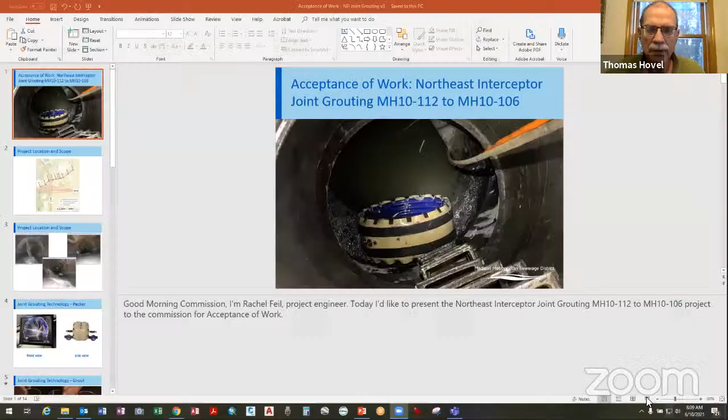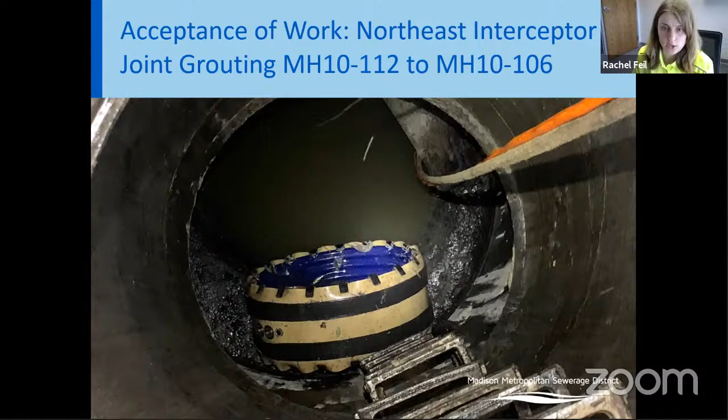Okay, are you able to see my screen in presentation mode? Yes. Okay, thank you. Good morning, Commission. I'm Rachel Feil, project engineer, and today I'd like to present the Northeast Interceptor Joint Grouting Manhole 10-112 to Manhole 10-106 project to the Commission for acceptance of work.

The project location is shown here in red. The project is near the intersection of Highway 30 and Highway 51 on the east side of Madison. North of that intersection, the Northeast Interceptor runs on the north side and then continues on the west side of that intersection before reaching Pump Station 10.

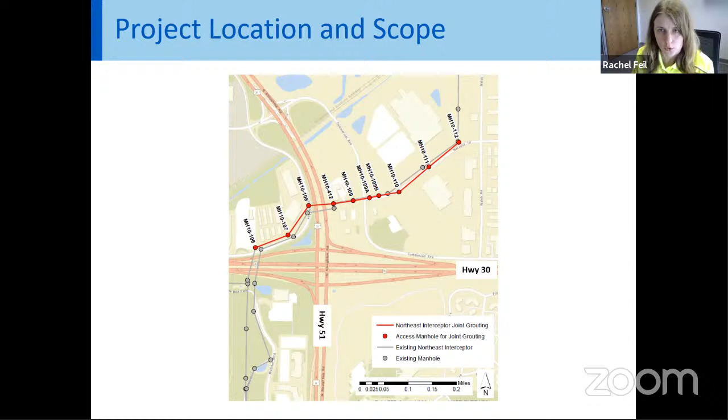There are two parallel lines that make up this Northeast Interceptor. One was constructed in 1964 and is 48-inch diameter reinforced concrete pipe. Routine district inspection recently of this 1964 sewer revealed that the pipe was in good structural condition, but numerous joints were suffering from inflow and infiltration, known as I&I. Here are some photos of the district's inspection of the interceptor.

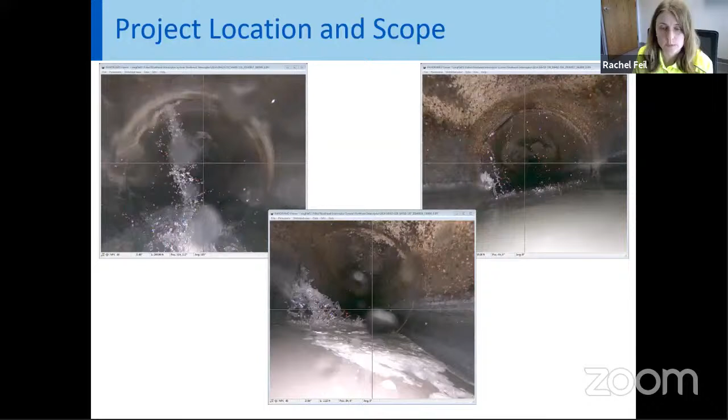As you can see in these photos, there are leaks of I&I located at the pipe joint itself where water is coming in. I&I is an issue for two reasons: one, it takes away capacity from our interceptor, and two, it represents water that is being unnecessarily pumped and treated.

Leaks such as these can be addressed by joint grouting. Joint grouting is a technology that uses a donut-shaped piece of equipment known as a packer. This packer is placed inside the existing pipe at the leaky joint and pumps out grout to seal the leak.

I wanted to share two photos, two different views of the packer. First, the front view of the packer when it's inside the pipe. You can see the rigid blue skeleton or frame of the packer, which supports on the outside a tan soft skin that seals against the pipe on both sides of the joint to create a seal.

Now, on the side view of the packer, you can get a better view of what that skin looks like that seals up against the pipe. You'll notice there are two ridges, which essentially straddle the joint in the middle. When inflated, these ridges create that seal, front and back, with the joint in the middle. This is where the grout comes out, pushed right into the leak itself to seal it up.

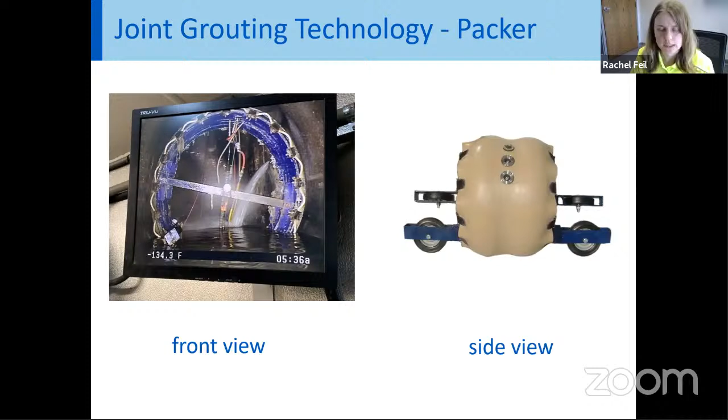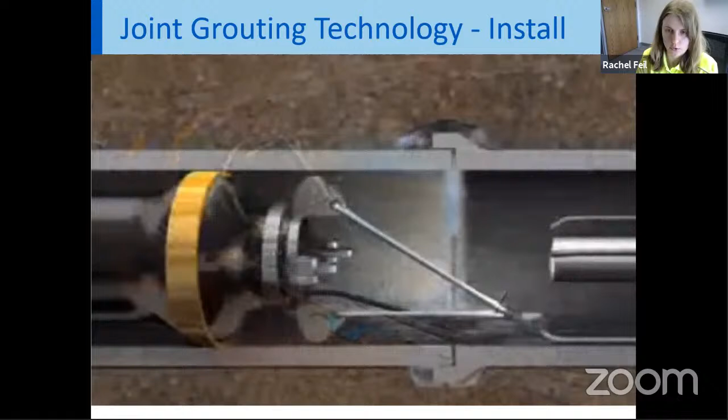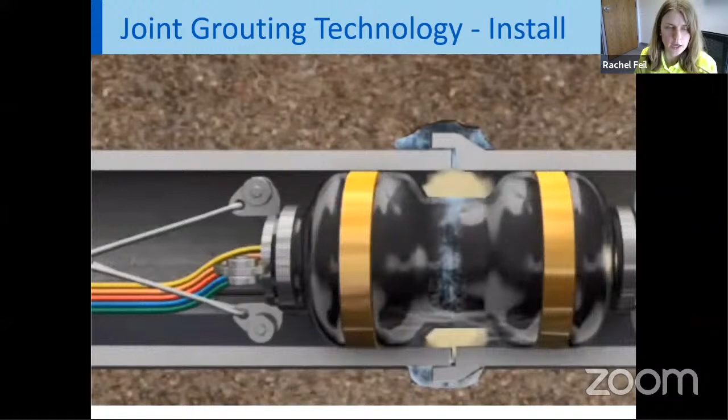So now putting this together, this packer technology and the grout, I want to share another video. Here's the leak at the joint, and the packer for this video is shown in black. We'll see the packer moving into position, inflating itself to create that seal, and now grouting, sending grout out to seal that up.

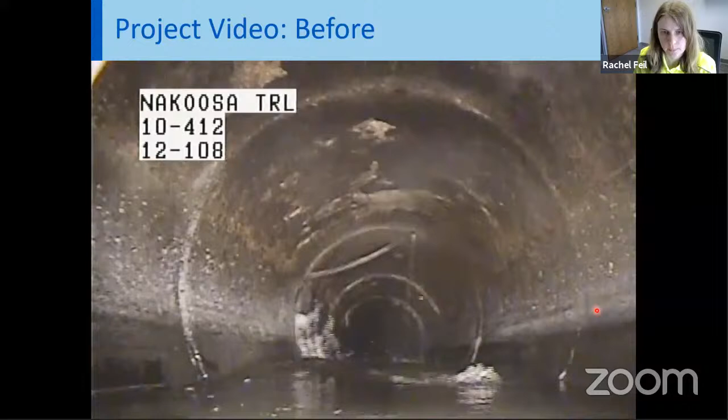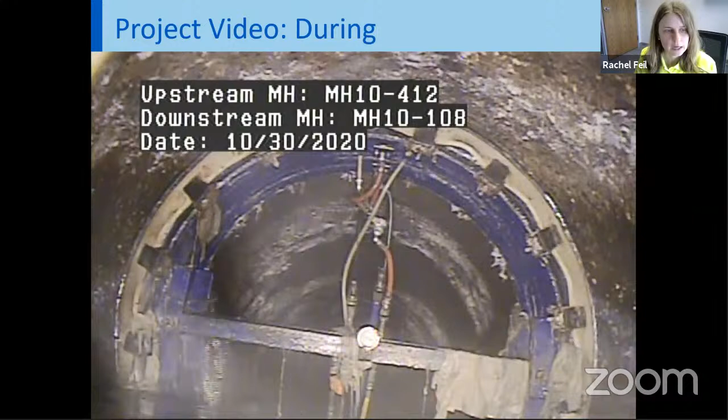This here is the during video. The packer is in the pipe here, moving in on this joint. In the video, you'll see this is that joint. You'll see a little bit of water coming out the backside. It's right about to inflate, right before it gets that seal. Just to show you, it's in the pipe and about to seal itself.

Now, this is the after video, after the packer has pressed up against the wall of the pipe, sealed, and pumped grout. In this video, the packer is currently sitting on that leaky joint. When it moves, we should be able to see if the leaks were fixed. Here it's pulling away from the joint, and here in white, that is the grout ring. No more leaks are present at this joint, so we have successfully sealed this joint.

This joint is just one of the 280 joints that were grouted from this project. Overall, this project eliminated approximately over 28,000 gallons per day of I&I, which translates into increased capacity, energy, and cost savings. I also want to mention that this project was the first time we at the district have grouted large 48-inch diameter pipe of this size. This project is also the first of 2 projects to continue to address leaks in the Northeast Interceptor. There will be a second forthcoming project that will continue down the line addressing leaks to Pump Station 10.

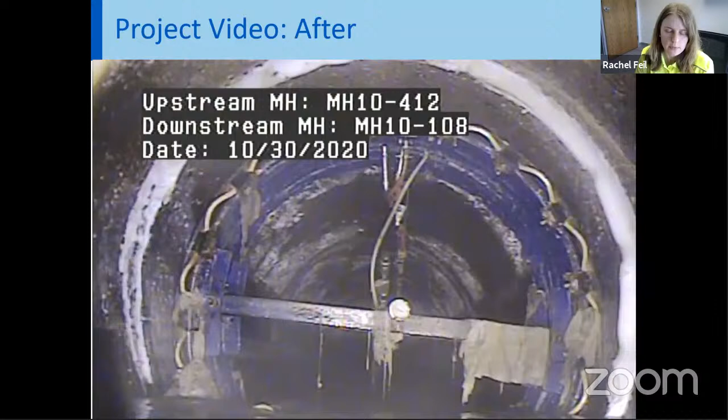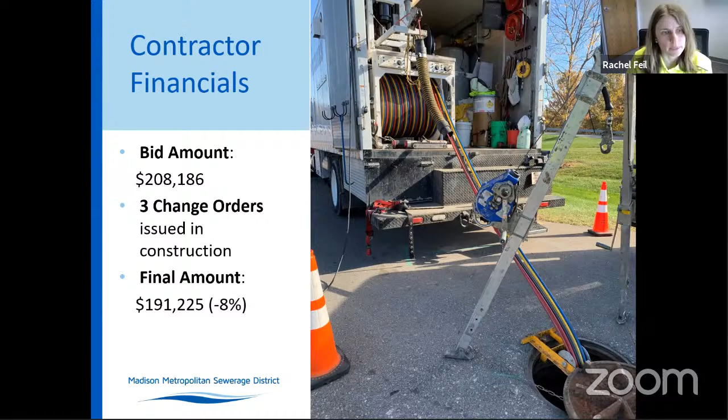Moving on now to project financials. From a contractor perspective, Michels Corporation was awarded the project. Their bid amount was approximately $208,000. During the course of construction, there were 3 change orders, and at the end, the total amount was less than the bid amount, approximately 8% below, or about $191,000.

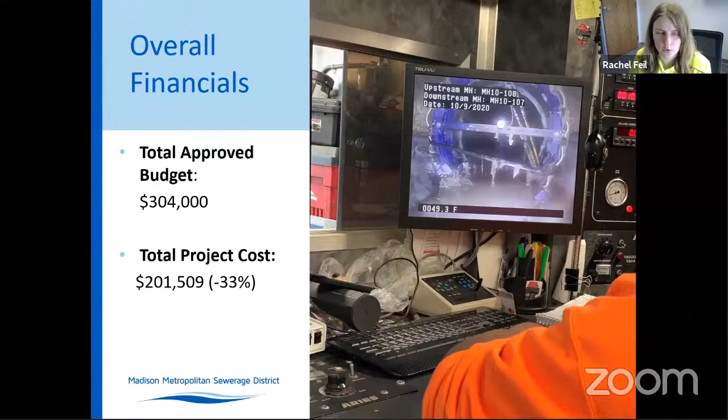From an overall project standpoint, including costs such as district labor with the contractor's construction cost, the total approved budget for this project was $304,000. At the end of the project, with all costs included, we are significantly below that, at approximately $201,000.

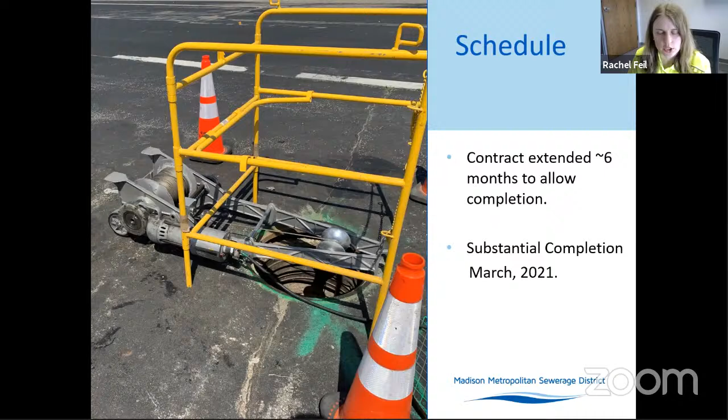To speak to the project schedule, the work started in 2020 and the project schedule was extended by 6 months. This did not pose any problems to the district, and the project was substantially complete in March of this year.

In conclusion, this Northeast Interceptor joint grouting project has been completed and has reduced I&I. A resolution has been drafted to accept the work. The district will hold a $10,000 maintenance retainer. $5,000 of that will be held as a retainer for the 11-month post-grouting televising and will be released thereafter. The remaining $5,000 is a typical maintenance retainer, which will be released at 1 year. So approval is requested to accept the work and make final payment.

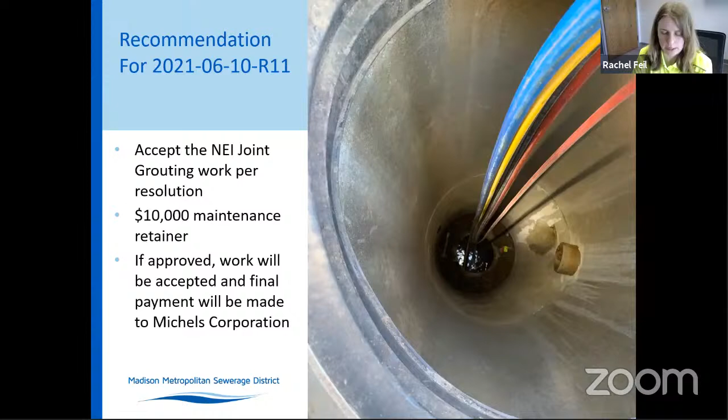With that, are there any questions? Okay, thank you very much, Rachel. Interesting what technology can do. Anybody have any questions?

Rachel, maybe you could just explain briefly why the project cost went down.

Sure. So like I mentioned, this was the first time we have grouted pipe of this size diameter, and also this is a relatively old pipe from 1964. So there were some existing conditions of this pipe that caused us to use a different type of grout. If you remember in the video, the grout was originally green at the end—that's the type most traditionally and commonly used. But you'll notice in the video, the grout ring was white.

So we ended up switching grout types to a more expensive grout that's white, which has an additive in it to help with the existing conditions on our pipe. But ultimately it's a stronger grout, so we used less of it overall in quantity. Basically, a stronger grout meant we didn't use as much as we thought, and that actually worked in our favor at the end of the day.

That will move us to Marty, who is going to lead off the study session on biosolids management.

Good morning, commissioners. Let me just pop my camera on here.

All right, thanks. So this morning I'm going to give a little overview of our biosolids management study recommendations that we undertook over this past year, 2020.

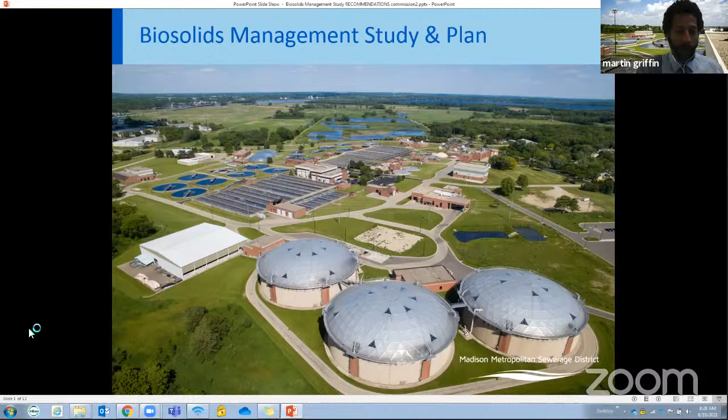So the district has always been generating biosolids as a byproduct of our wastewater treatment, and the disposal of biosolids is really an unavoidable step for the plant to continue operating. So we've always looked for ways to improve the management and reuse of our biosolids and accomplish disposal in a way that's environmentally beneficial.

And so during World War II in the 40s, with the labor shortages, that's when the district switched to using lagoons as storage. Then we began land application on agricultural farm fields in 1974. The brand name Metrogro was coined in the late 70s, and that's when the Metrogro program was officially launched.

In 1993, that's when the current storage tanks - the 3 large storage tanks visible from the maintenance facility - were completed. Then the last type of operational change to our biosolids program was in the early 2000s, where we made an addition to our digestion process to allow us to create a different quality of biosolids called Class A biosolids quality. That's when we began to experiment with other ways to utilize Class A biosolids.

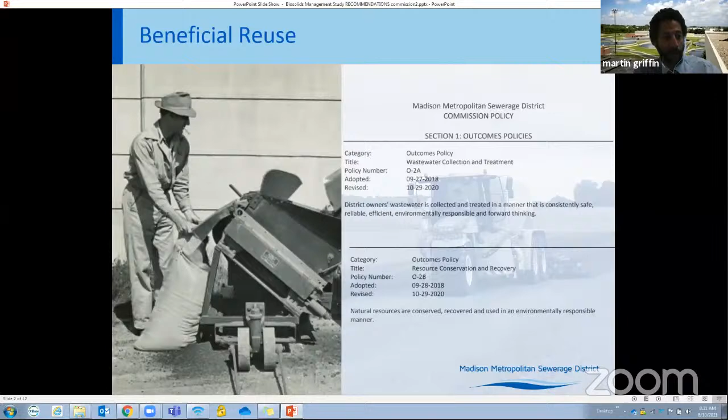On the right side of this slide, you can see a screenshot of the commission policy outcomes. This description of our history of beneficial reuse has really manifested itself in our commission policy outcomes, and we really are ensuring that we take this holistic approach to biosolids reuse.

And so we want to be part of this resource recovery cycle. Our current program is land application. We spread biosolids on farm fields.

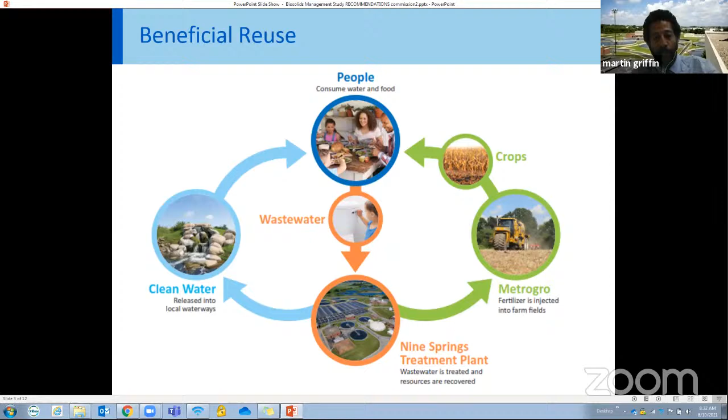It's a valuable nutrient, so as we move toward options for the future, we still want to continue taking this holistic approach and making sure that the nutrients we collect through our wastewater process, even though we have biosolids we have to deal with, are returned to the food cycle where they originated. This really does help with other district programs when we take this holistic approach, namely our 20-year adaptive management project, which is focusing on nutrients and water quality improvements.

So our current approach of land application is facing increased pressure, labor demands, program cost, and our cost effectiveness is being challenged. The reasons are some of these ideas you see up on the screen here.

Our agricultural land has increasing regulatory and operational requirements, and some of our customers, our farming customers, are changing the way they farm. Farming is moving forward, and they may be moving toward a type of cropping system or farming where they're interested in soil conservation, and maybe our program doesn't meet some of their requirements in terms of soil disturbance.

And then we look at our land application program for agricultural land, but as changing land use occurs in our area, namely increasing urbanization, those pose challenges with distances to get to farm fields, and other challenges.

And then of course, climate change and weather impacts really affect the time of year we can apply on farm fields. So our application windows are very challenged when it comes to climate change, predicting increased precipitation and intensity of rain. Wet weather does not go well with trying to put fertilizer on farm fields.

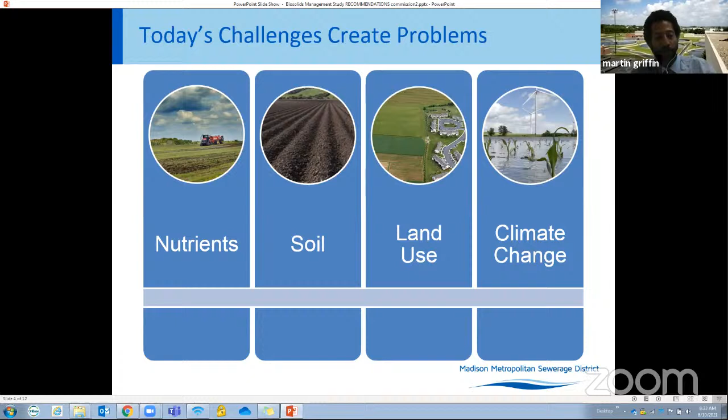So that was a trigger for the biosolids management plan. In 2020, like I mentioned, we decided to embark on this journey to identify concrete practical steps to develop solutions to sustain our operations.

And so I came to you twice in 2020 to give you updates, and today I'm going to really just give you the breakdown of the exact recommendations. But the purpose of the study really is to help us understand alternatives to our program that will reduce or eliminate those challenges and concerns that I showed on the previous screen.

And so as we better understand these alternatives, then we're in a better position to have a more flexible product distribution and be less dependent on some of those things that are posing challenges for us. So how do we do this?

The first thing we did is a program assessment. We assessed our existing program, and that helps us get a baseline of what's happening. So then we can identify if there are any administrative, management, or infrastructure bottlenecks that we need to hone in on when we look at what a future might look like.

We then had to develop metrics to inform a quadruple bottom line analysis. These are scoring metrics that account for economic, environment, social, what our customer wants, and our operational criteria. These metrics give us a score to help us evaluate this list of alternatives where we're looking towards the future.

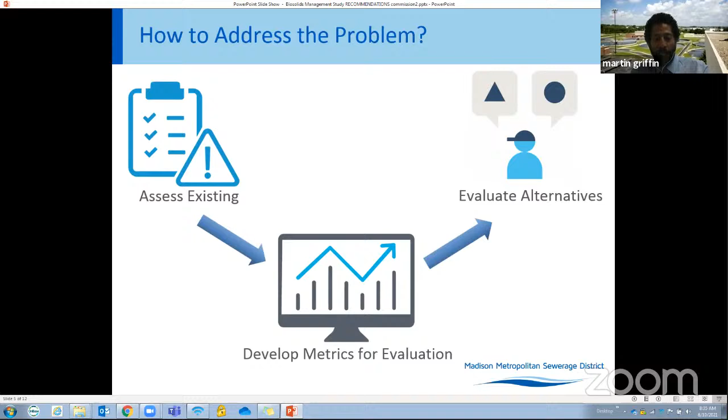So that three-tiered approach really helped us answer these three key questions. Which types of products are desired by the market? I talked about some of the challenges with our current products and operations. Which products are going to be complementary toward our resource recovery goals?

We have commission outcomes. We've been recovering resources for a while, and we want to continue meeting those goals. And then which of these options that are out there are really going to be the easiest for us to integrate into stuff we're already doing? It's always good to look at how we can move forward with the least amount of disruption. As you know, we run a very large ship, and sometimes it's hard to turn the rudder so quickly.

And then two other things that are underlying thoughts with these questions: timing—how fast can we do something like this? I gave the ship example, but also making sure that whatever path we ultimately decide on really utilizes a flexible platform that allows us to investigate and implement additional alternatives on a different time scale.

So what did we find out? Well, the first thing we found out was a Class A biosolids product, like an enhanced product, is going to always provide a higher level of customer value and environmental benefit. So it really, in the quadruple bottom line analysis, scored super high in those two areas.

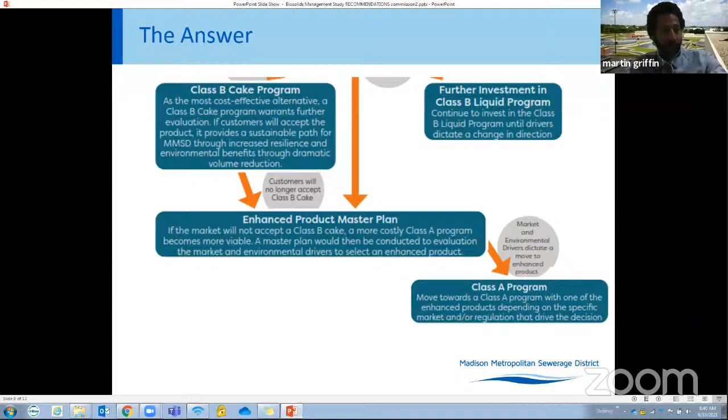So to wrap it all up, we're looking to change our recovered resources to a better viable product to address those challenges, because these challenges that I mentioned earlier are actually opportunities with the right product, right? Just switching from liquid, our current program, to a drier product, or a product that has additional organics, or a product that doesn't require tillage, really can change the way nutrients are handled, keep soil out of the waterways, improve soil health. Products can be applied in more areas than just on the farm. Maybe it can be applied in areas outside the farm field.

And so that leverages our changing land use. And of course, products that could be stored, stacked, not at our plant, but somewhere else where the user can apply it when needed, maybe doesn't rely on weather windows for application. So it creates more resilience. So that's really what I have to say.

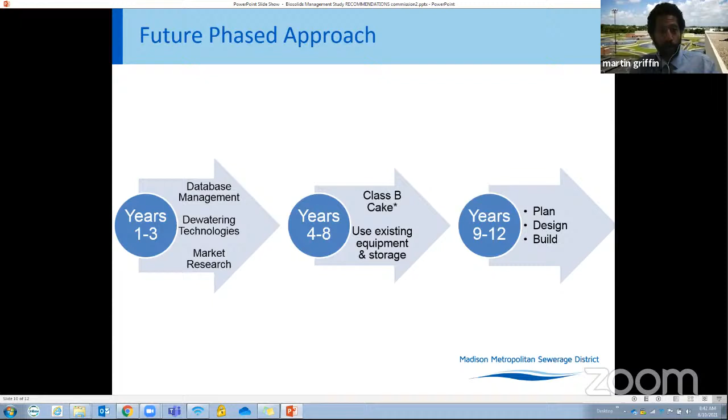You'll notice the asterisk on the Class B cake. That's because of what I mentioned, that we have to see if that's actually a viable product. So if it is, this is the timeline. If it isn't, that middle step would be used researching maybe other product to lead toward planning for something permanent.

Hey Marty, good presentation, thanks for all the good work on this. I wanted to ask, and I'll admit I read the executive summary but not the huge attached report, but I'm wondering about those environmental benefits, at least in the net of the Class A product. Just explain a little bit what those are. I get the value added to the customer, that side of the ledger, but I'm wondering about those environmental improvements when you compare Class B as we do now with switching to Class A.

Hey, can I interrupt one second? Marty, is Class A cake similar to Milorganite, a fertilizer, or is it different?

So yeah, I'll clarify Class A. Class A cake is not similar to Milorganite. Milorganite is a Class A product. If you want to use a similar term like cake, you would use something like a dried pelletized product. So Milorganite is a Class A, but it's different than a Class A cake.

Okay, I'm just wanting to get an idea of how this stuff fits within the hierarchy of what I know. And then, sorry Ezra, but one other question was the Metro Mix that we attempted to make for a while. Is that a Class B cake or is that something else?